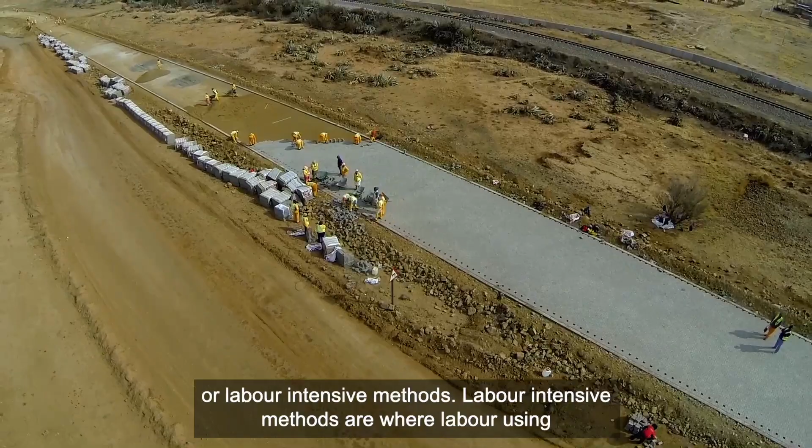What is the link between roads and the climate crisis? Roads are primarily designed for the transportation of people and goods from one place to another, safely, comfortably, and expeditiously. Roads can be constructed using machines or labor-intensive methods. Labor-intensive methods are where labor using hand tools is the primary resource and is supported by light equipment if necessary, thereby creating more employment.

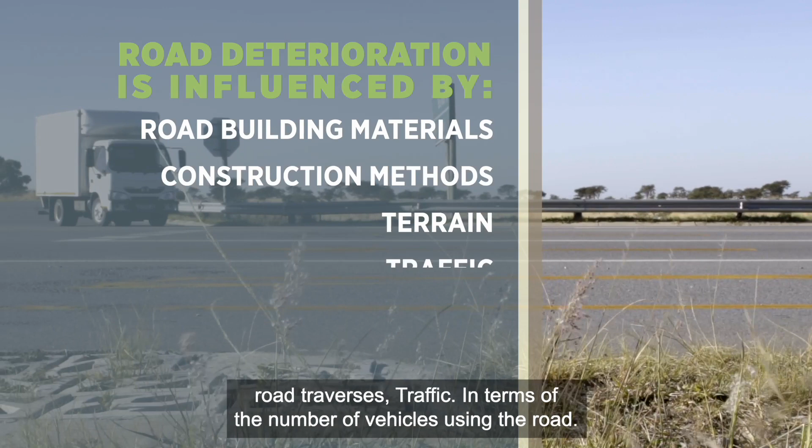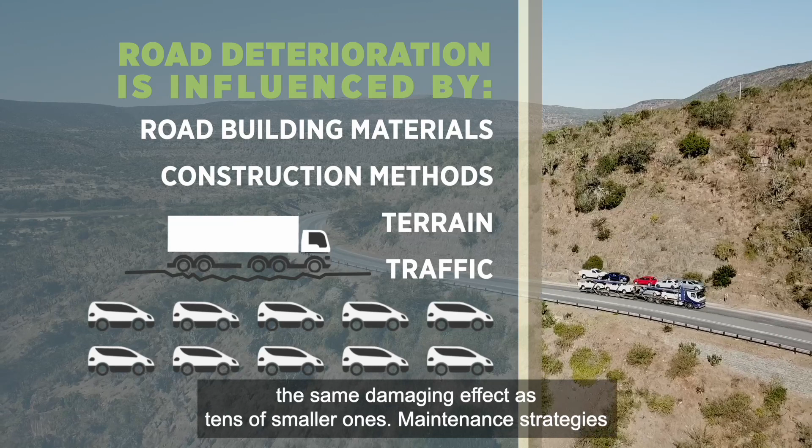Traditionally, road deterioration is largely influenced by the following variables: road building materials, construction methods, terrain along which the road traverses, traffic in terms of the number of vehicles using the road, and the proportion of heavy vehicles to small ones. One heavy vehicle has the same damaging effect as tens of smaller ones. Maintenance strategies and environmental conditions. Quite often, these variables act in combination.

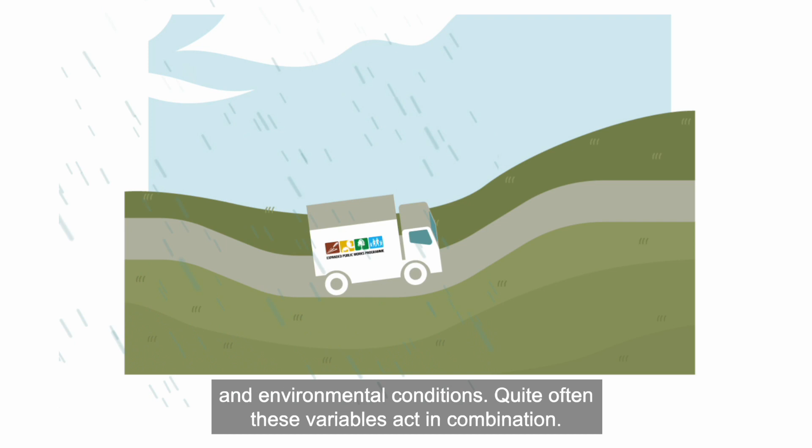For example, use of substandard construction methods, utilizing poor quality materials in hilly terrain, in a high rainfall area, on a poorly maintained but highly trafficked road with heavy vehicles is a cocktail for disaster. But the most important factor accounting for road failure is water. The effect of water can, to a large extent, be controlled by the drainage that is provided.

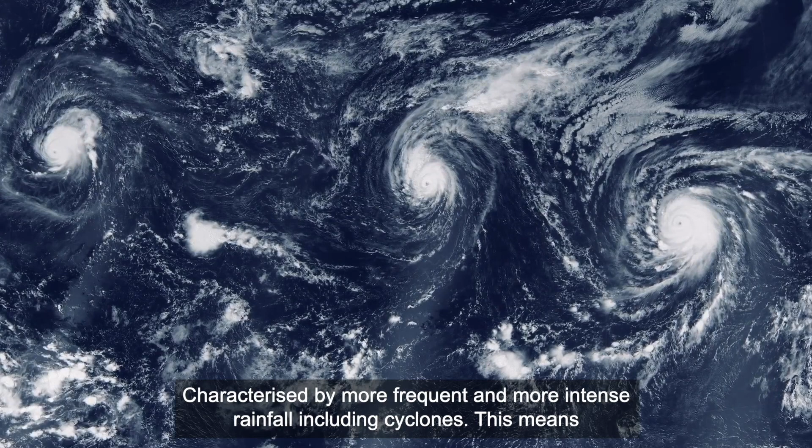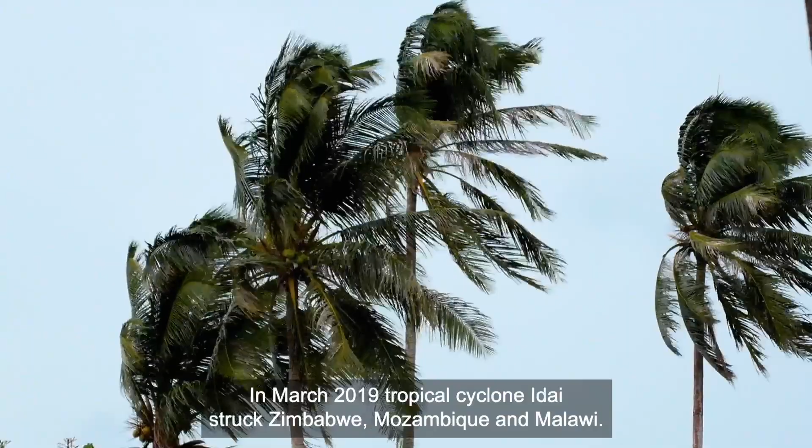The climate crisis is manifesting in unpredictable weather patterns, characterized by more frequent and more intense rainfall, including cyclones. This means a lot more water. In March 2019, Tropical Cyclone Idai struck Zimbabwe, Mozambique, and Malawi. Cyclone Idai is recorded as one of the worst tropical cyclones on record to affect Africa and the Southern Hemisphere.

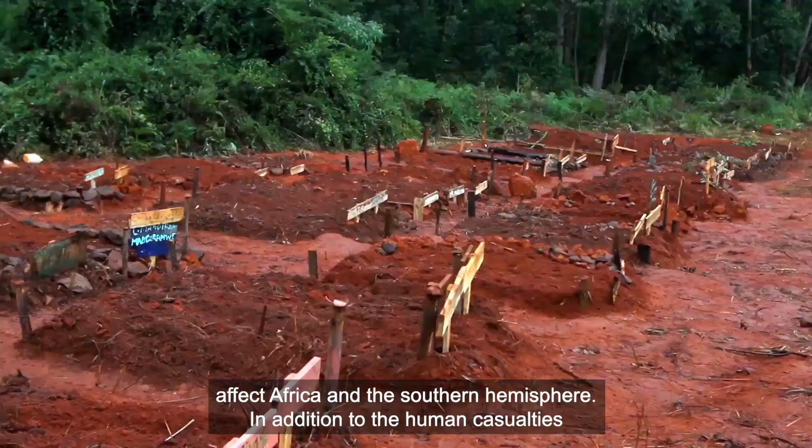In addition to the human casualties, infrastructure, which includes roads, was destroyed. In April 2019, floods damaged infrastructure in South Africa, including houses, roads, and bridges. I had the opportunity to visit Mozambique, Zimbabwe, and South Africa to do post-disaster assessments of infrastructure that was left damaged.

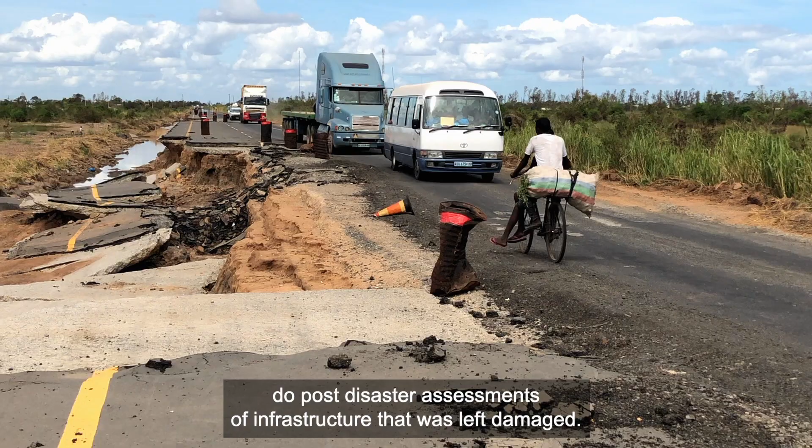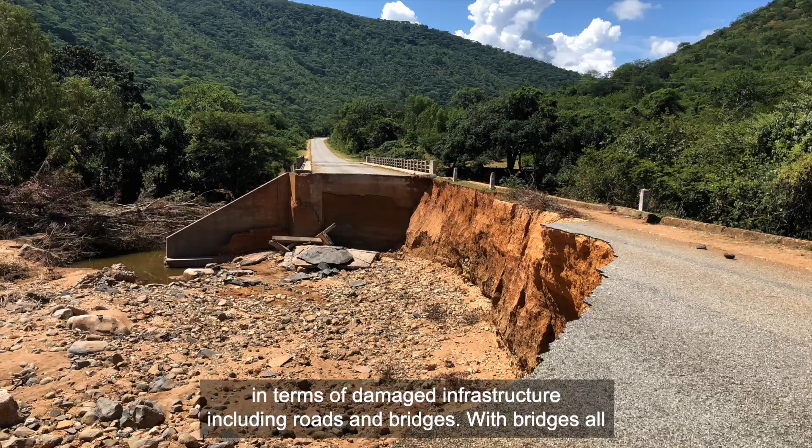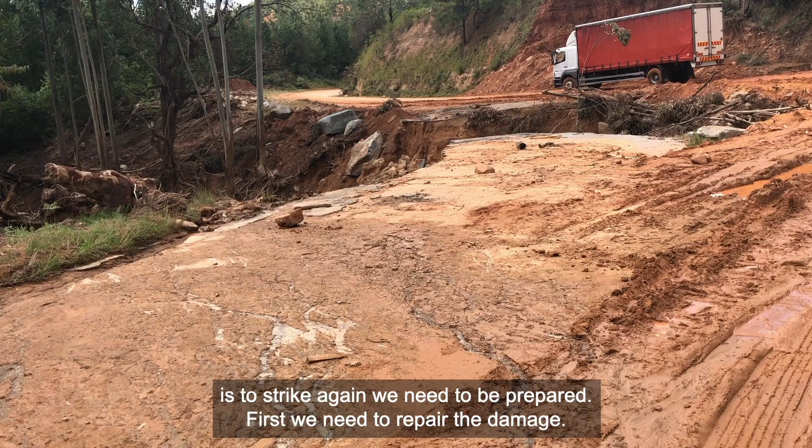Besides the loss of human life, these disasters left a trail of destruction in terms of damaged infrastructure, including roads and bridges. With bridges, all of them overtopped. The parapets got damaged, the approaches to the bridges, the fill material was eroded away, the superstructure was left standing. If a disaster of similar magnitude is to strike again, we need to be prepared.

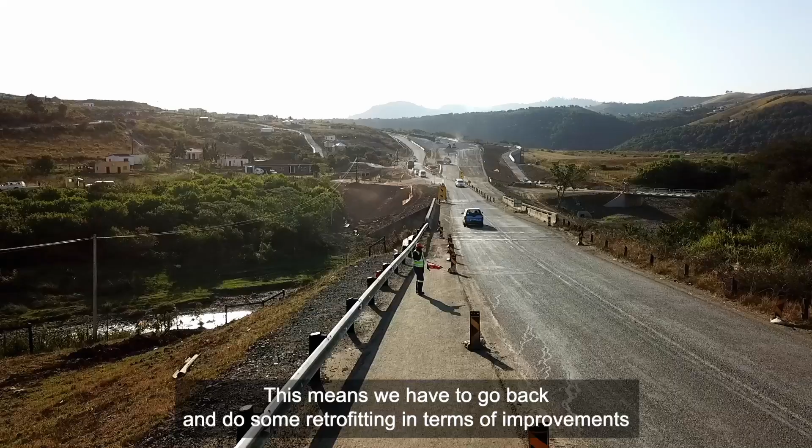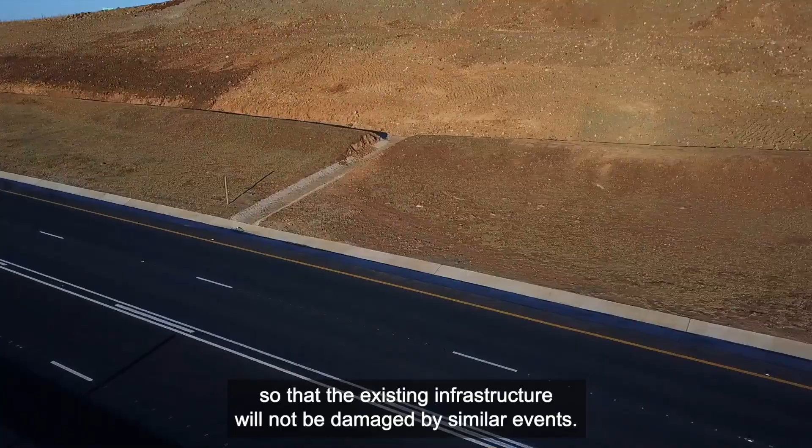First, we need to repair the damage. It's not simply putting back what was there. We need to build back better so that if a similar event occurs, we have less damage, if we get damage at all. The next thing we need to do is to climate-proof the infrastructure that was not damaged. This means we have to go back and do some retrofitting in terms of improvements so that the existing infrastructure will not be damaged by similar events. It is better to be prepared to know where your infrastructure is than to start looking for it post-disaster.

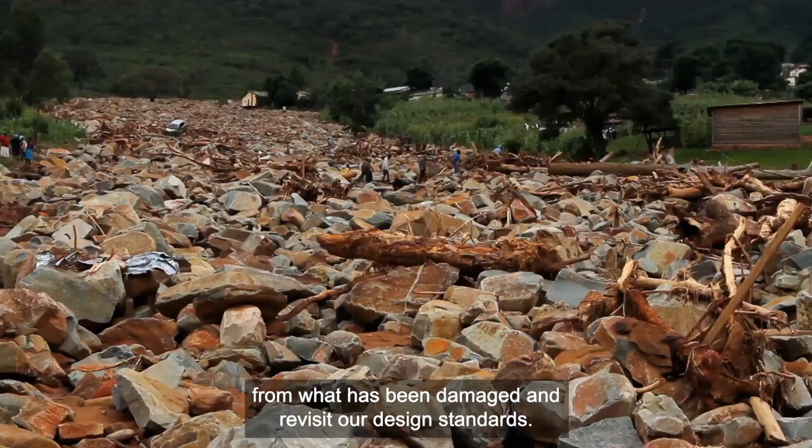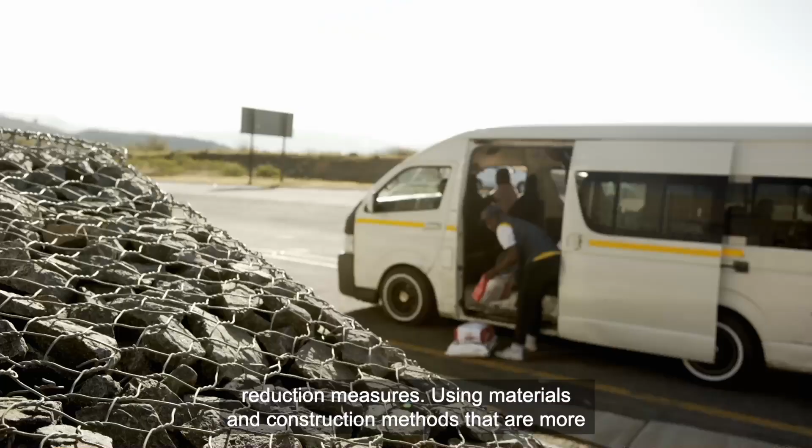The third thing we need to do, we need to learn from what has been damaged and revisit our design standards. In the context of adaptation for roads, this may entail introducing better building standards for disaster risk reduction measures, using materials and construction methods that are more locally attuned and responsive to the local environmental conditions.

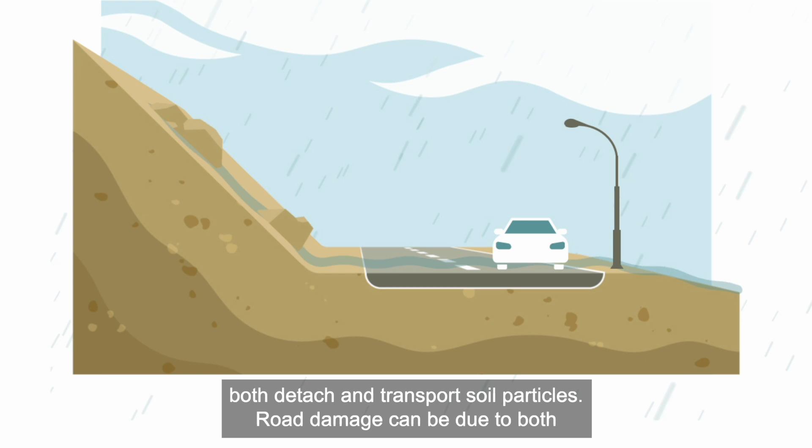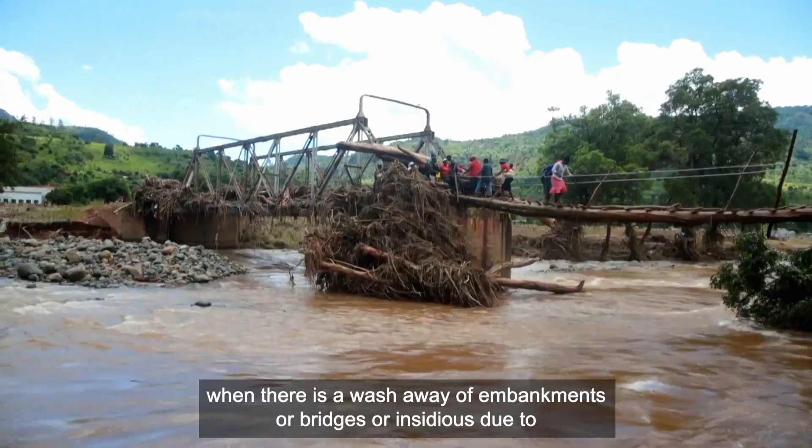Rainfall impact and runoff are the main agents of erosion because they both detach and transport soil particles. Road damage can be due to both surface and groundwater. Road failure can either be spectacular, such as when there is a washaway of embankments or bridges, or insidious due to the ingress of water weakening the pavement layers. Surface water damages the road, mainly by eroding the road building materials.

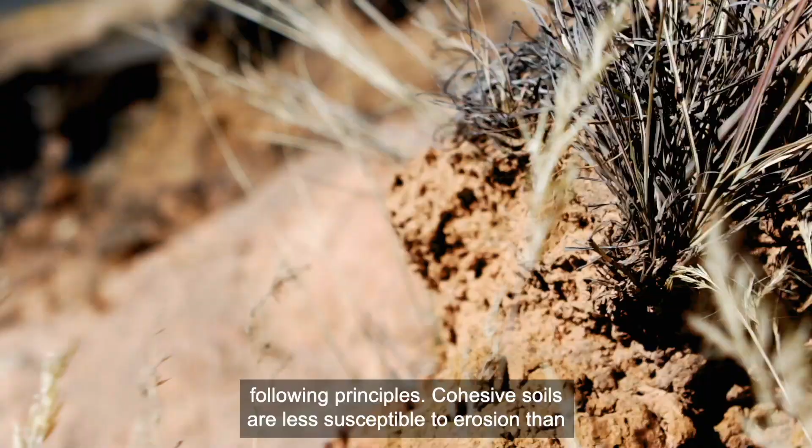Erosion is governed by the following principles. Cohesive soils are less susceptible to erosion than non-cohesive soils. The longer the slope, the more the erosion. The steeper the gradient, the more the erosion. The more the rainfall intensity, the more erosion. The more the vegetative cover, the less the erosion.

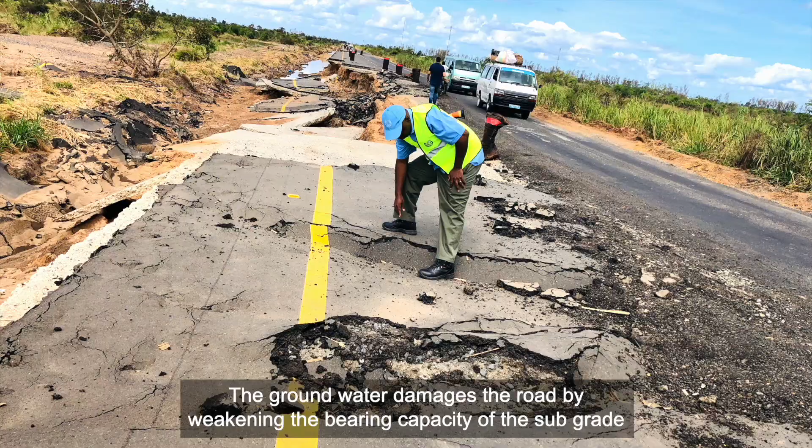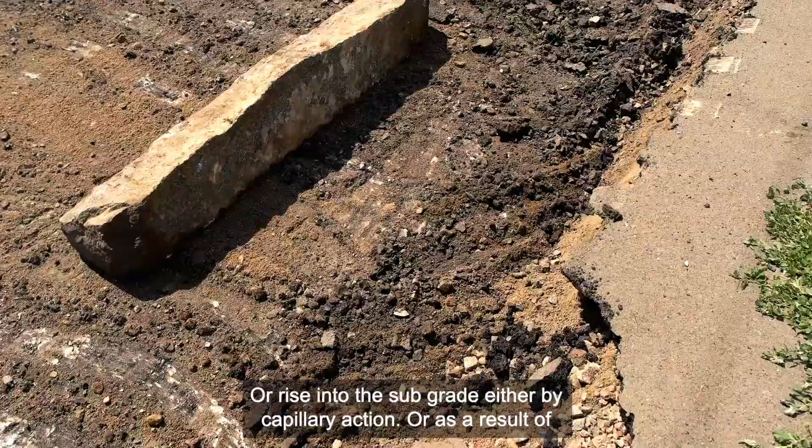The groundwater damages the road by weakening the bearing capacity of the subgrade and pavement layers. This water may infiltrate into the pavement from the top and shoulders, or rise into the subgrade either by capillary action or as a result of the elevation of the water table. Where a temporary or permanent water table exists, the road should be raised above the surrounding country.

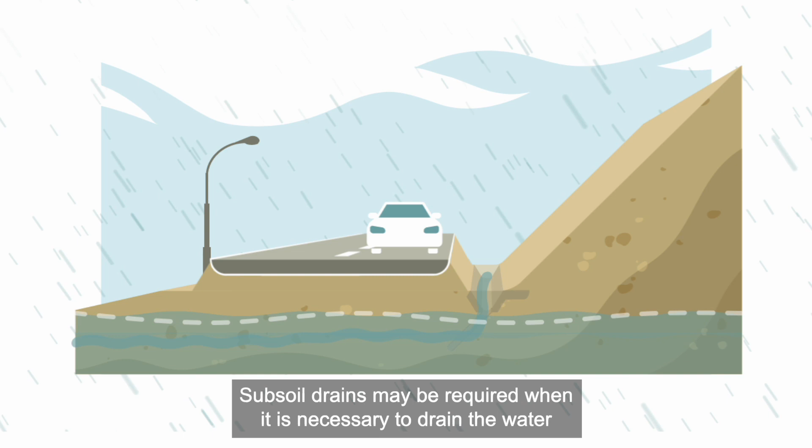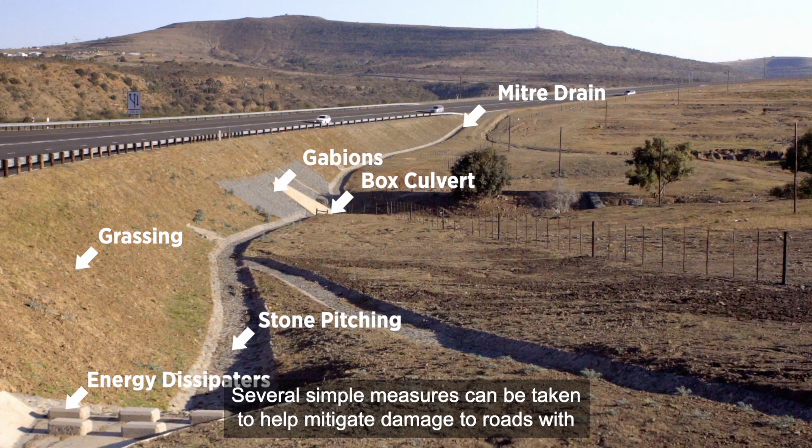Subsoil drains may be required when it is necessary to drain the water from under the road or away from the backfill of the structures, such as bridges or culverts. Several simple measures can be taken to help mitigate damage to roads with regards to adequate road drainage.

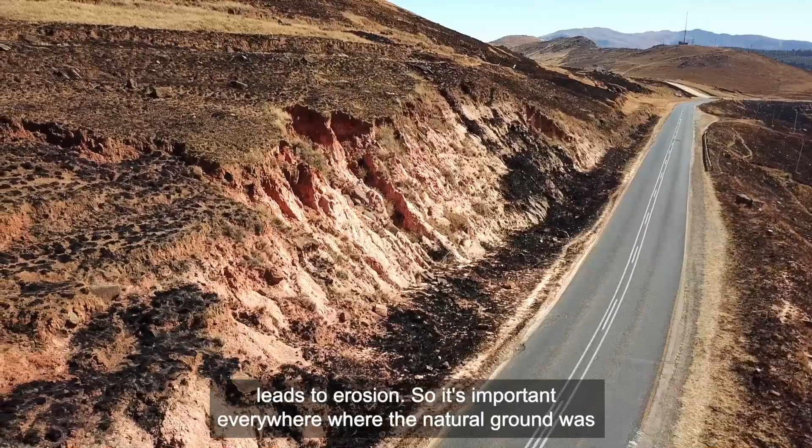So the overall purpose of grassing on a construction project is mainly for erosion protection. When there's grass, it slows down runoff, which essentially leads to erosion. So it's important everywhere where the natural ground was disturbed to try and establish grass as soon as possible if there's no other measures of erosion protection.

Consider the type of grass to be used. Grass that's indigenous to the area, that's adapted to the area, that will grow fast and that will also survive in the long run. Depending on where you use it, you also got to think of what type of grass you use, how big it will get, how tall, what maintenance is required. Some grasses require less maintenance than others, some last longer than others.

Hydroseeding is also a way of establishing grass growth. Grass seeds and fertilizers and mulch are mixed in and then sprayed over large areas. This mixture then allows for the fast germination of the grass, can be sprayed over long distances, can be used in inaccessible areas where it's not always easy to access by people, and you get good coverage if applied right.

You want to do it in the right time of year when there is some rain expected and also not too much that seeds might wash away. Cutting grooves along these slopes helps in retaining the seed in the grooves, because what you don't want is a big rain to follow a hydroseeding process, washing all the seed down to the bottom of the slope.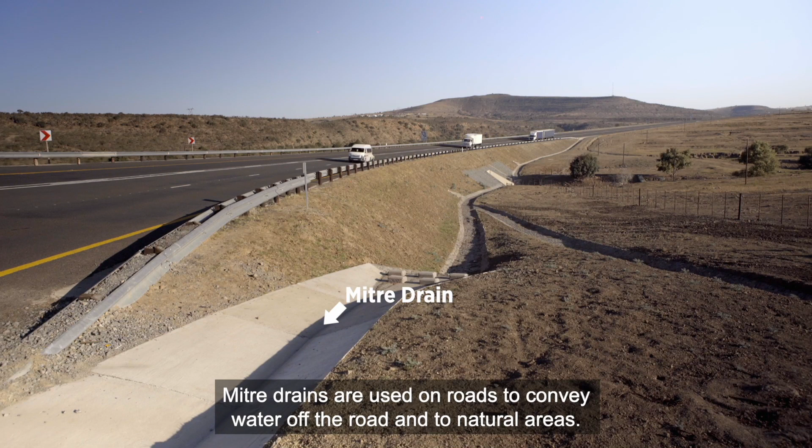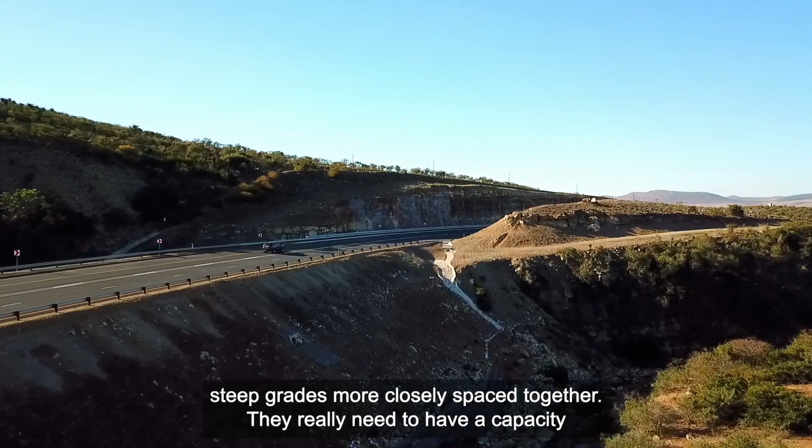Mitre drains are used on roads to convey water off the road and to natural areas. Design considerations include having sufficient of them when you're on steep grades, more closely spaced together. They really need to have a capacity that can handle the predicted flow that that particular outlet would anticipate.

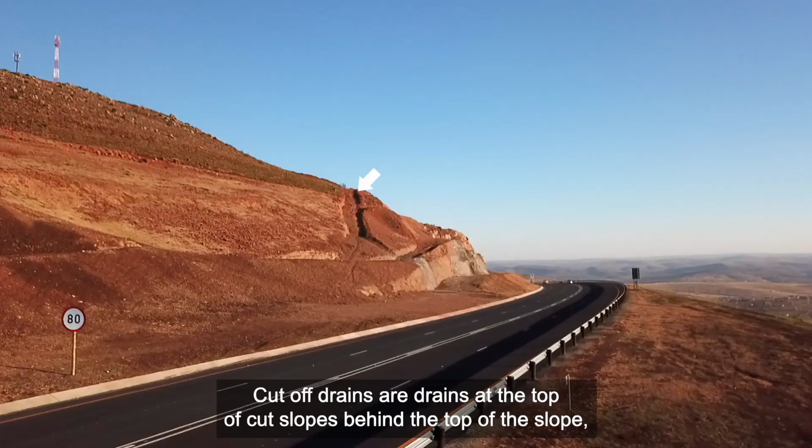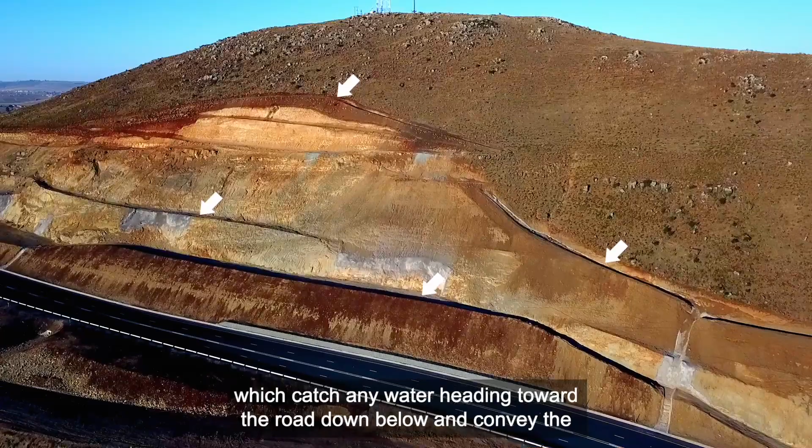Cut-off drains are drains at the top of cut slopes, behind the top of the slope, which catch any water heading toward the road down below and convey the water safely to the bottom of the slope on either side of it, then conveyed off to a natural water course.

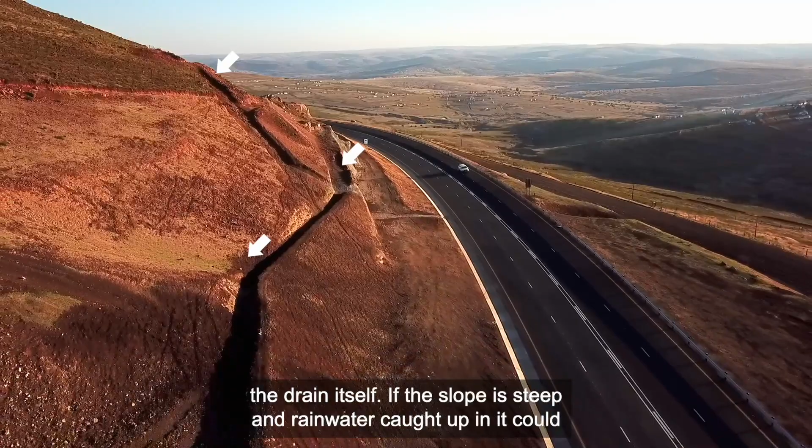When you construct a cut-off drain, you should consider the flow that it would carry. You need to consider the slope of the drain itself. If the slope is steep and rainwater caught up in it could lead to erosion of the drain, consider lining it with something like stone pitching or other means.

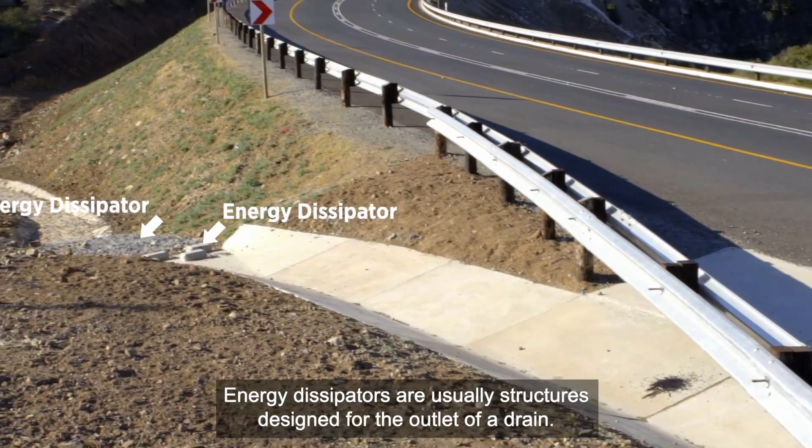Energy dissipators are usually structures designed for the outlet of a drain. The main purpose is to slow down the velocity of the water before it lets out into the natural environment to prevent erosion.

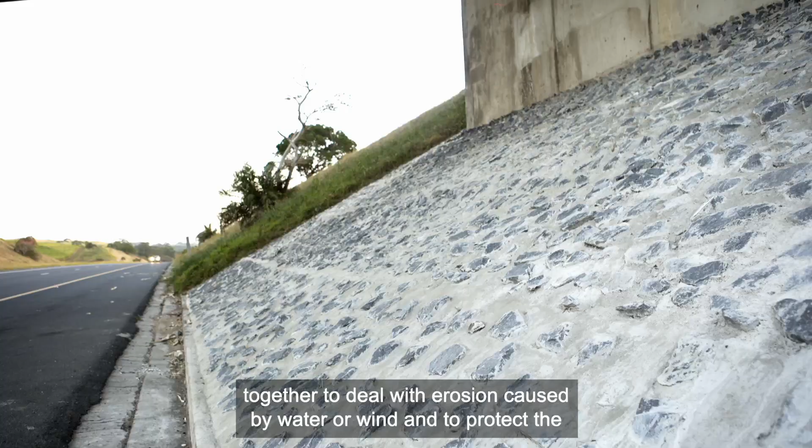Stone pitching is 300-200 millimeter type of size of stone packed tightly together to deal with erosion caused by water or wind and to protect the underlying earth. Sometimes stone pitching is grouted with cement or embedded in concrete where the flow of stormwater is anticipated to be high, in which case it would lead to erosion below the stone pitching were it not grouted.

By its very nature, it is a labor-intensive form of construction. If you use the same type of stones that's available in the environment, it looks good to the eye, but the main purpose is erosion protection.

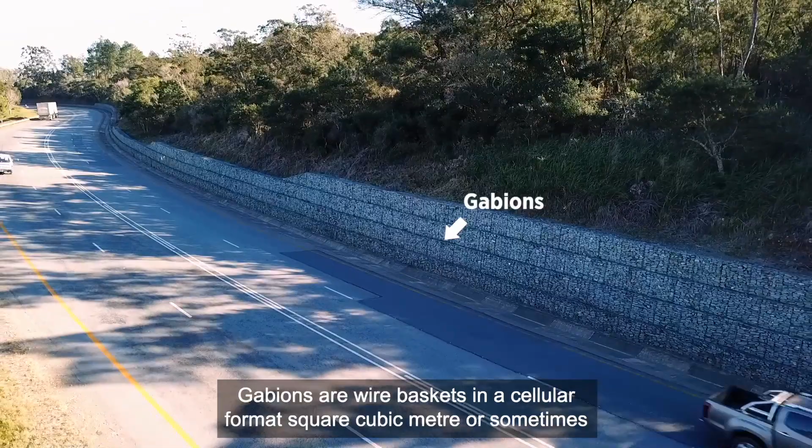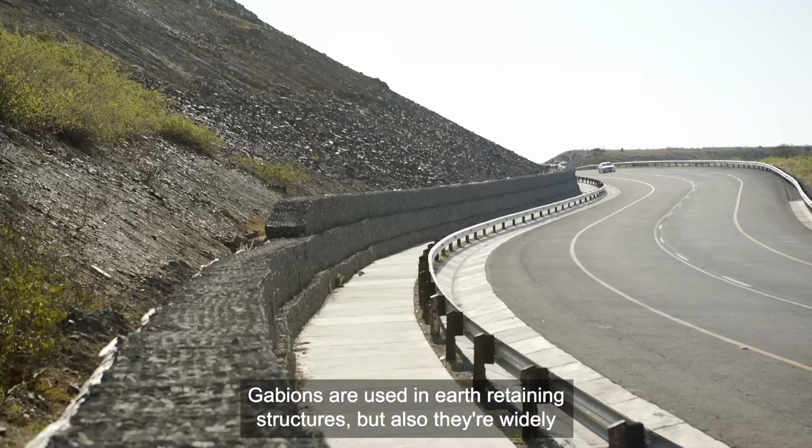Gabions are wire baskets in a cellular format, square cubic meter, or sometimes in a flatter format called Reno mattresses. They are filled with stone. The wire mesh forming the mattress or the gabion are then tied together. Gabions are used in earth-retaining structures but also they're widely used to cut down flow of water, to dissipate energy.

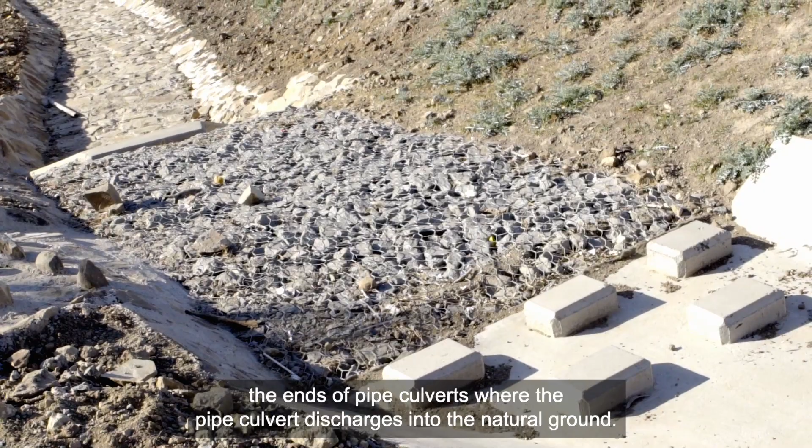They're often used at the ends of pipe culverts, where the pipe culvert discharges into the natural ground. The water would first go into a Reno mattress. The layout of the stone and the fact that there's gaps between them and the roughness of the mattress provides good energy dissipation.

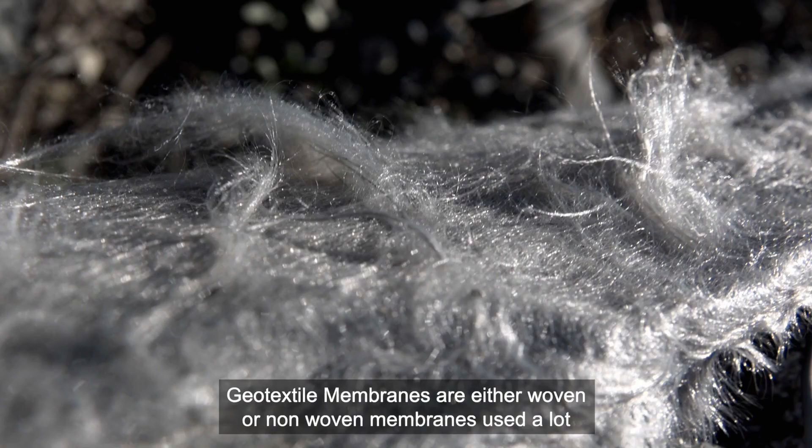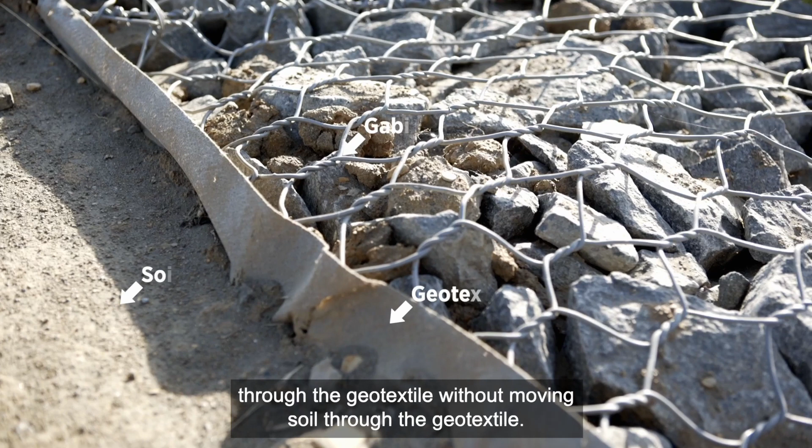Geotextile membranes are either woven or non-woven membranes, used a lot in filtering. For instance, the geotextile would be positioned at the back between the soil and the gabion to allow the groundwater through the geotextile without moving soil through the geotextile. They would also be used in things like subsoil drains, crushed stone drains. It would stop the ingress of finer materials which would then clog the drain.

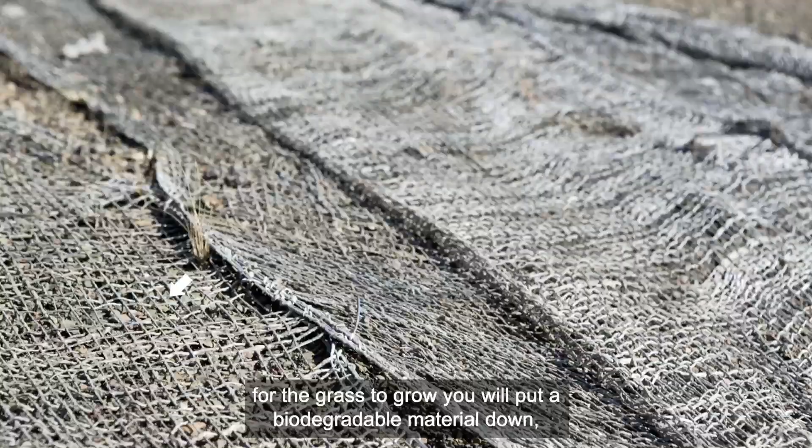Biodegradable material can be used in erosion protection. It's not a permanent solution, but it assists with the growth of the grass, so the hydroseed needs to be assisted. Usually on steep slopes where there's not much grip for the grass to grow, you would put a biodegradable material down, which will assist in holding down your seeds and your fertilizers until there's sufficient growth. Usually after a few years, these materials will just degrade and will become one with the environment.

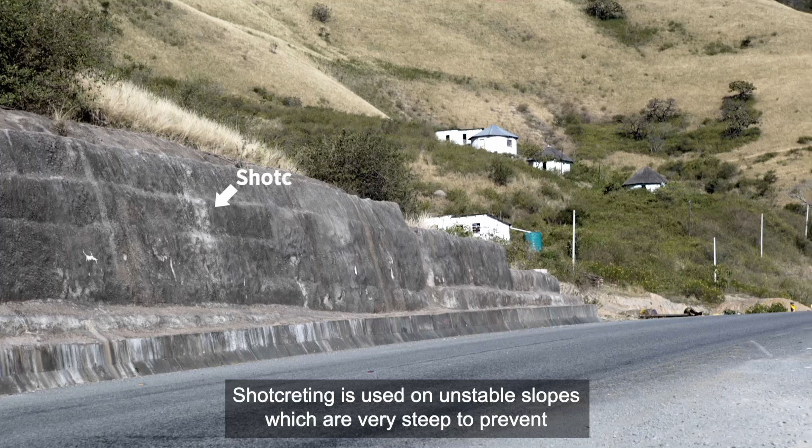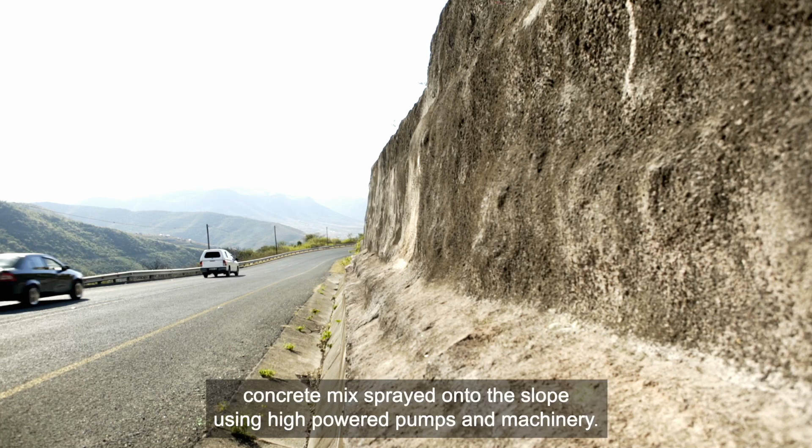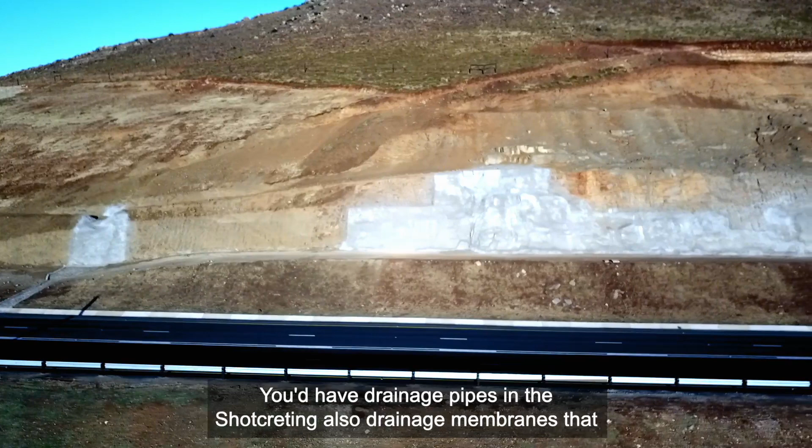Shotcreting is used on unstable slopes which are very steep to prevent the slope from collapsing. Shotcrete is used, and it's basically a fluid concrete mix sprayed onto the slope using high-powered pumps and machinery. You'd have drainage pipes in the shotcreting, also drainage membranes that would prevent the water from exerting any kind of force on the shotcreting.

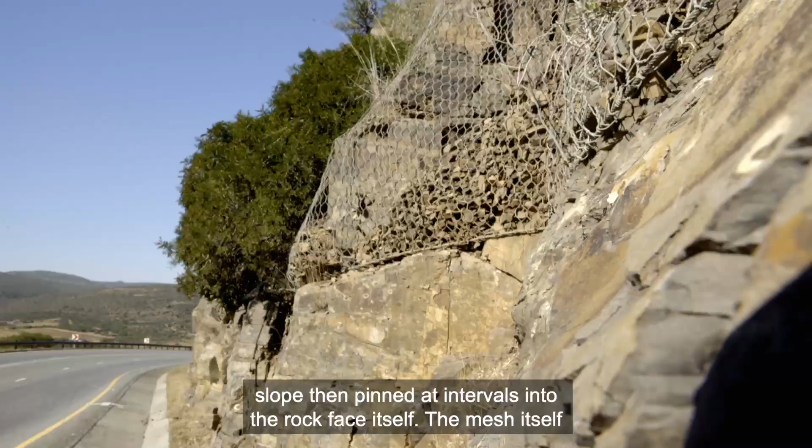In rock cuttings, it is difficult and costly to cut cuttings back to a safe slope so that rockfall is not a problem. So what is often done is that wire netting is pinned to the top of a slope. It is hung down the slope, then pinned at intervals into the rock face itself. The mesh itself has apertures 80 by 100, hexagonal. Hexagonal because it's double twisted so that if it cuts, it doesn't unravel. Diamond mesh would just unravel.

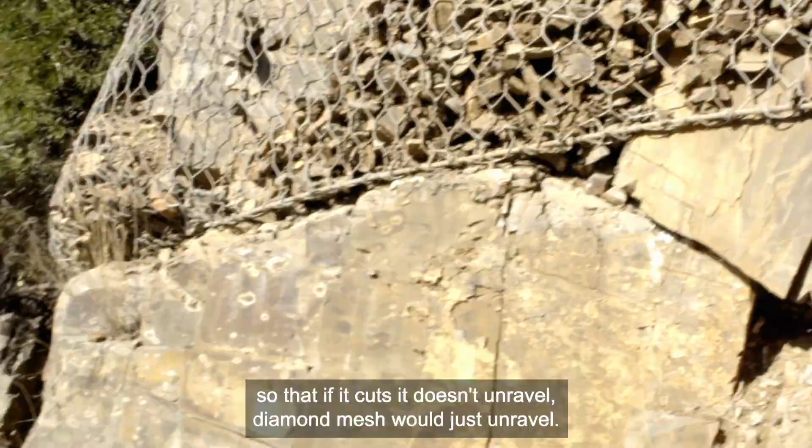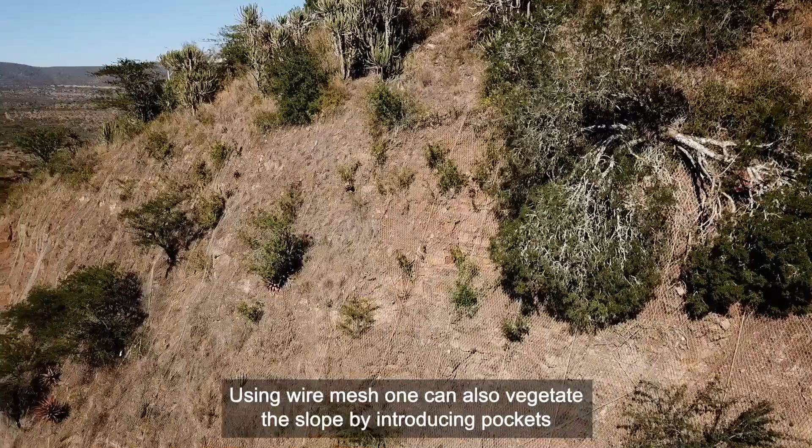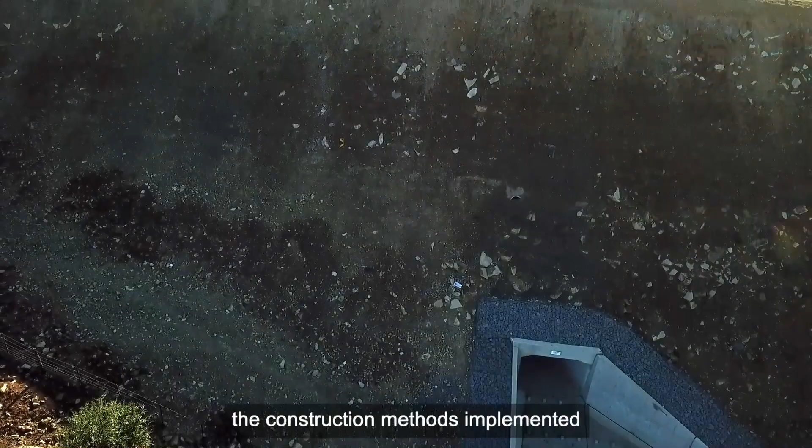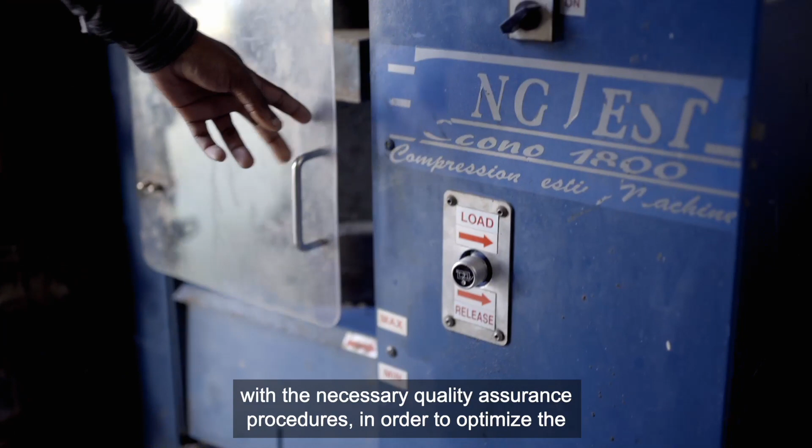The mesh serves as a containment of the rock that falls. Any fragments larger than the apertures in the mesh will be contained. Using wire mesh, one can also vegetate the slope by introducing pockets of topsoil and planting them up. Regardless of the construction materials used, the construction methods implemented, and maintenance strategies adopted, it is important to ensure compliance with the necessary quality assurance procedures in order to optimize the effective lifespan of any infrastructure asset.

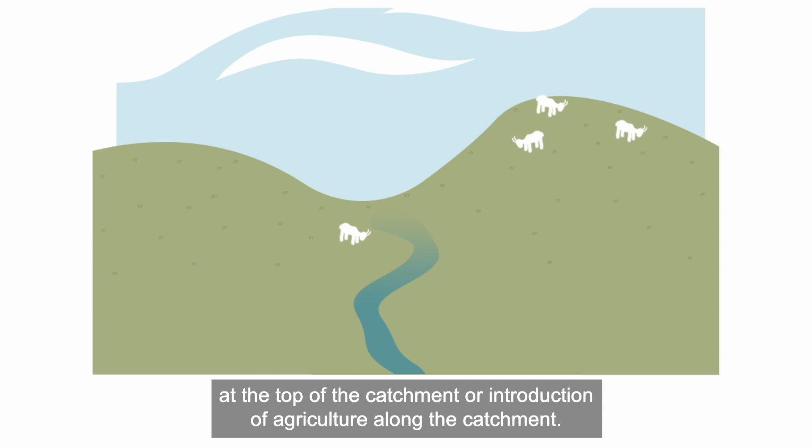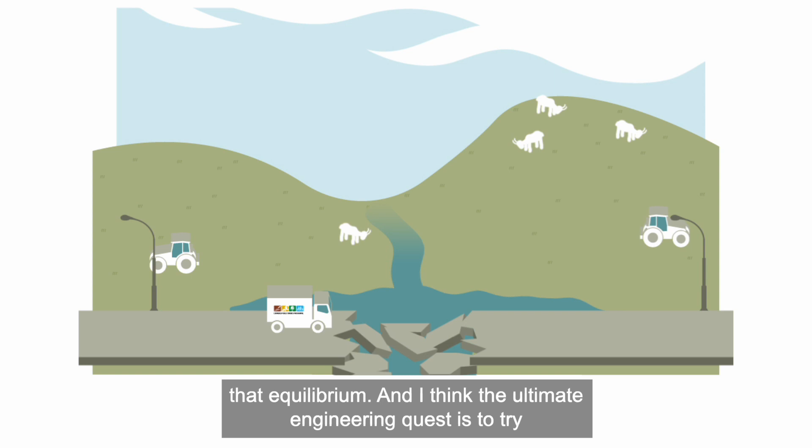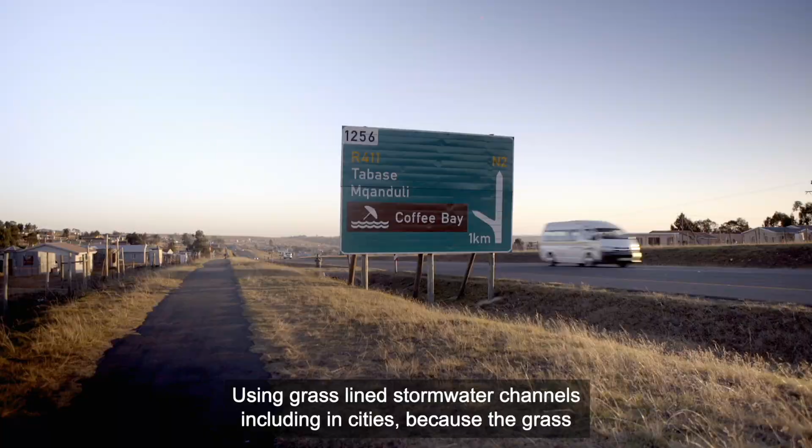When man goes into a catchment and fiddles with it in any way, be it overgrazing at the top of the catchment or introduction of agriculture along the catchment, any hard surfacing such as roads or towns and cities, we change the whole dynamics of the flow. So we look at the catchment in its entirety. Nature naturally creates an equilibrium, and where man has intervened, man has broken that equilibrium. And I think the ultimate engineering quest is to try and restore the equilibrium as naturally as possible. Using grass-lined stormwater channels, including in cities, because the grass-lined channels absorb water but also slow it down.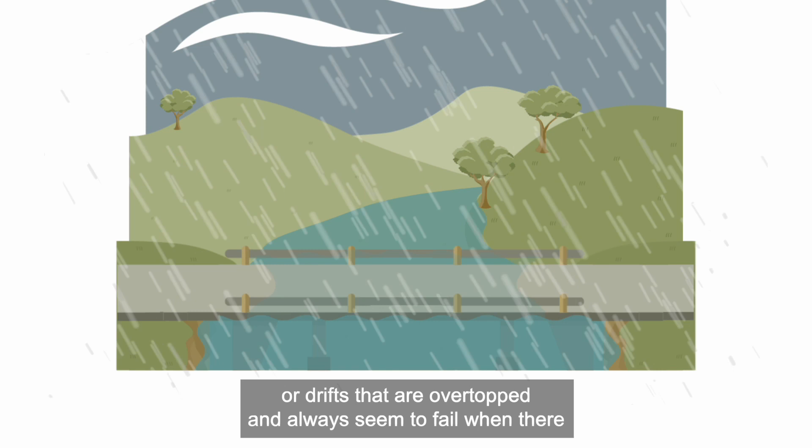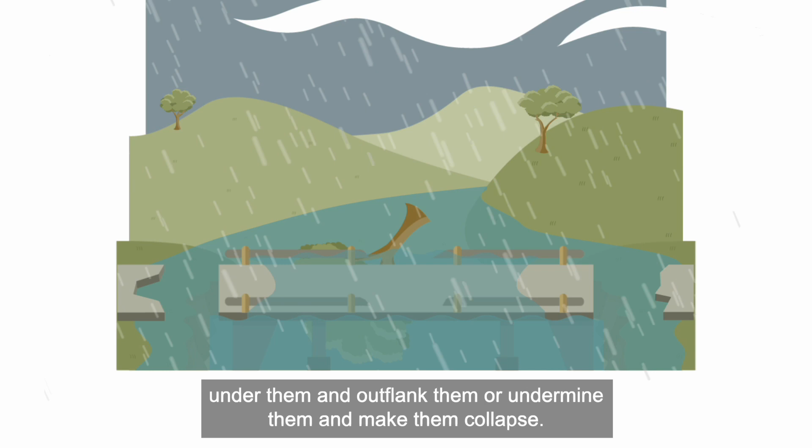With bridges that are overtopped or drifts that are overtopped and always seem to fail when there's a big flood, the upstream side is where water will go behind them or under them and outflank them or undermine them and make them collapse. There are tried and tested methods that have been used throughout the world. Vetiver grass is a very good one because of its intense root structure and known ability to hold water.

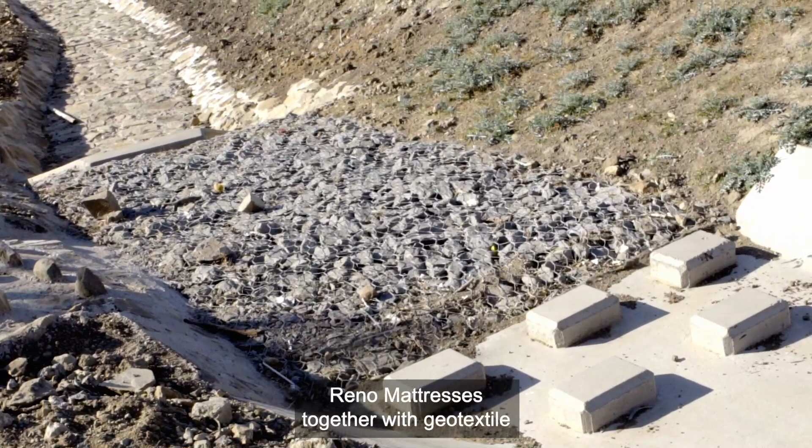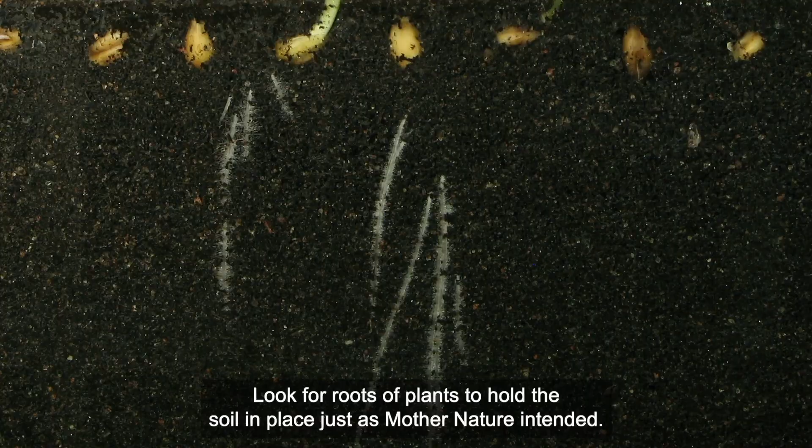The Reno mattresses, together with geotextile below them, are quite effective. So is stone pitching in the right circumstances. But with something hard like stone pitching, if you get a chink in the armor, you have a break in the structure, and it'll tend to fail at that point. Look for roots of plants to hold the soil in place just as Mother Nature intended it.

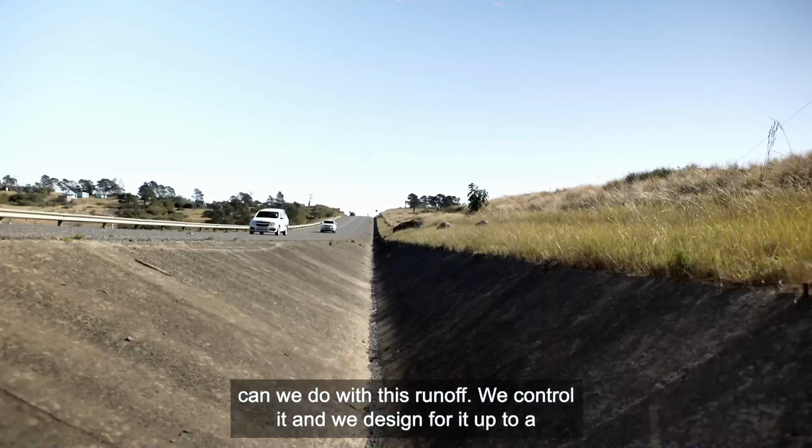While we're all focusing on drainage and how to control it, I think it's also important in a water-scarce country like South Africa to look at what we can do with this runoff. We control it and we design for it up to a point and then we let go of it. I think as part of drainage we also need to see how we can conserve this runoff water and reuse it.

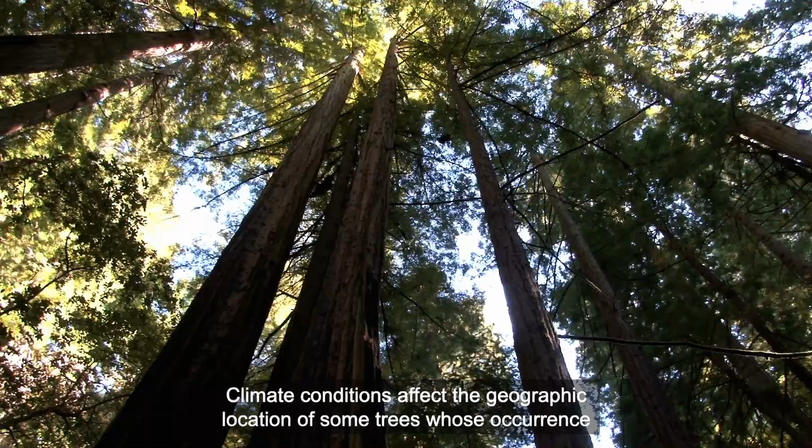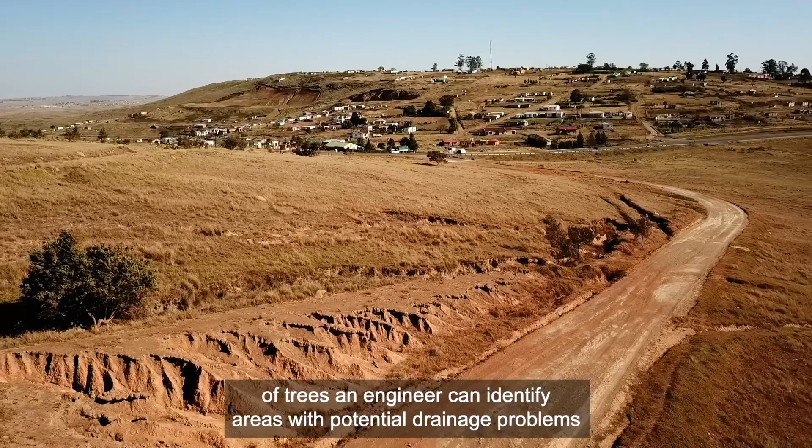Climate conditions affect the geographic location of some trees, whose occurrence may also be influenced by certain soil properties. Armed with the knowledge of trees, an engineer can identify areas with potential drainage problems in the road design process. Natural systems perform better than man-made systems in terms of disaster mitigation, which means us as humans, we fit our designs to what the rest of nature is doing.

As we transition to the fourth industrial revolution in a changing climate, it is imperative to leverage knowledge, tools and resources across non-traditional partners. Who knows, maybe one day we will build roads that perform better the more flooded they become.